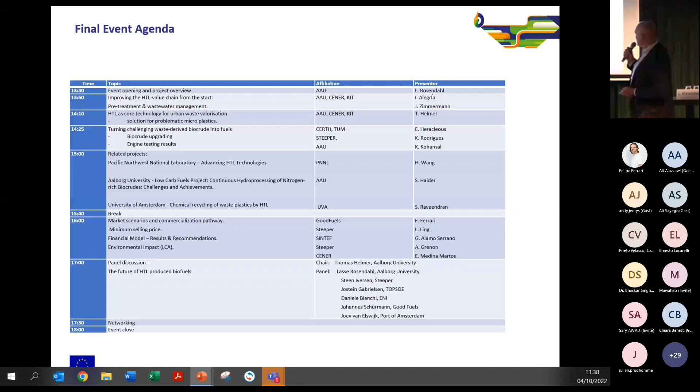Let me start. Let me give you an overview of what this project was about. So it's a project of 11 partners, 7 countries, 5 million euros, and 4 years. And we set out

with an ambition to address the circularity around our cities, and to do something good for the environment.

And because this was a response to a road fuel call, you can also, of course, tell from the name that it was focusing on diesel and gasoline, but we managed to sneak in marine fuels as well.

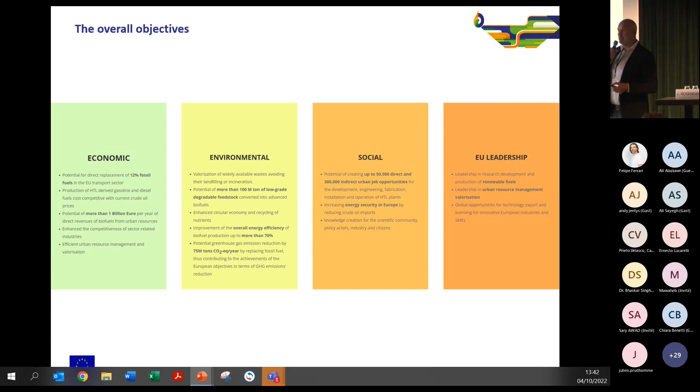Job creation is something we also targeted, direct and indirect, 50,000 and 300,000. And also this European leadership in renewables, the ambition that Europe should really lead the world in renewable energy. So these were the overall objectives that we started out addressing.

So what did we do, how did we do? Well, we have spent a lot of effort looking at pre-treatment, not just to make a feedstock that is better for the downstream process, but also to see if we could valorize side streams. This has been a big part of the project.

We have been operating at fairly large scale, pilot scale HTL. We've processed a lot of sludge, reaching something like 8 tons of sludge. And you can see we had, of course, the Corona break in the middle, but kept going after that.

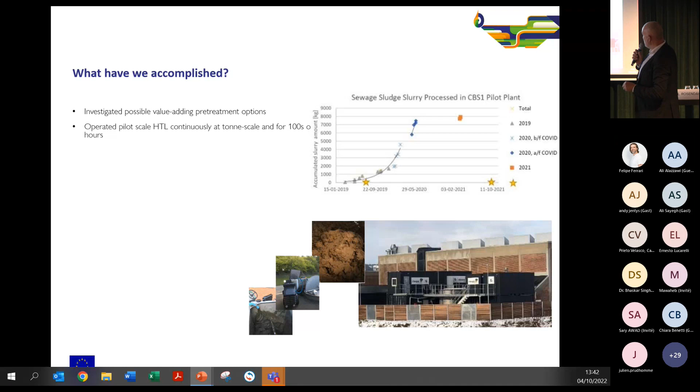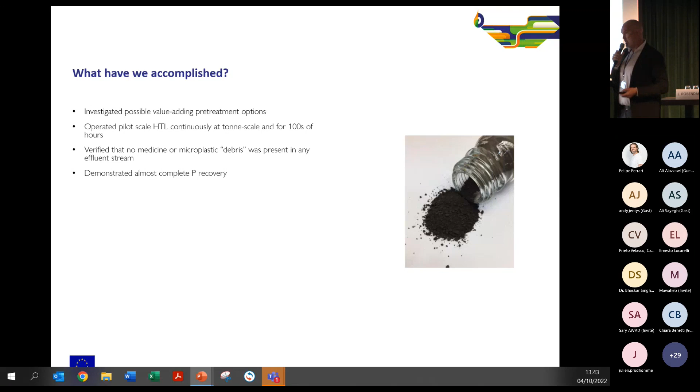We've been running continuously for hundreds of hours. We've been able to establish that none of the harmful stuff makes it to any of the effluents, so microplastics, medicine, debris—everything is really trapped in the HTL process. On the other hand, we've also demonstrated that we can recover some useful compounds, inorganic compounds, for example phosphorus, which is also present in the sludge in large quantities.

Working at pilot scale, we've had to come up with a method to take the raw biocrude and transform it into something that could be hydrotreated. So we've designed and implemented a pilot scale conditioning stage in order to accomplish this.

We've looked at water management. Water management is a key part of running efficient HTL, so we've been looking into many different ways of handling the water. This is an example from some of the membrane filtration that we've looked at as an approach to handle this.

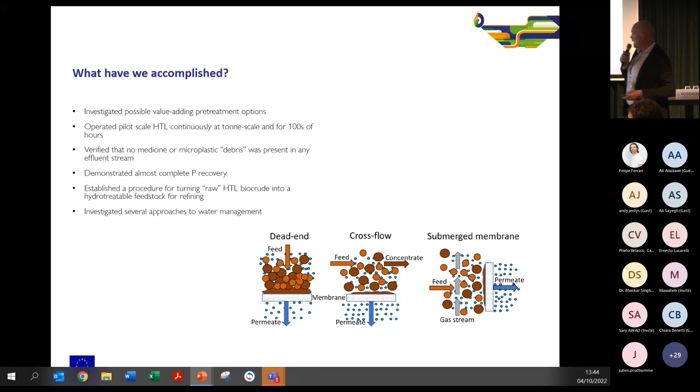The raw biocrude has been hydrotreated, again at pilot scale, and this is a very important feature of the project—we've worked at a scale that I think is first of a kind for HTL projects. We've actually been working at very large scale on all the stages we've looked at, working with multi-stage hydrotreatment.

At various sites, we've been looking at new ways of examining the effect of this hydrotreatment on the product, to determine to what extent we were actually going in the right direction. So also looking at new analysis methods.

We have generated lots and lots of data—very high quality, very high resolution, and of course complicated again by the scale, the fact that we're working at very large scale.

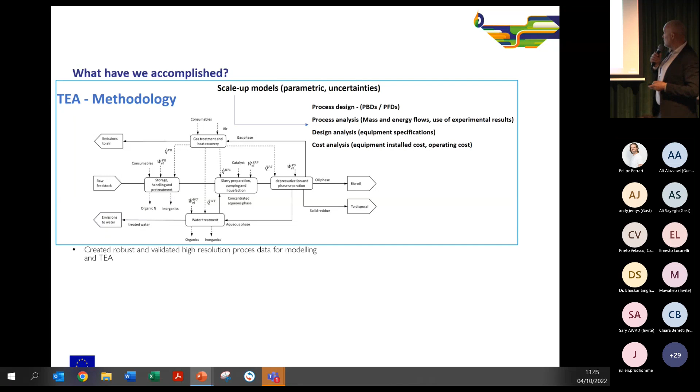I'm speaking as a university person now, not as an industry person, so I know there is a difference. But still, we've been working at a scale where all of the unit operations have to be linked, and in that linking it's really difficult to maintain full closure of mass—it's really hard not to lose anything. But we've accomplished that.

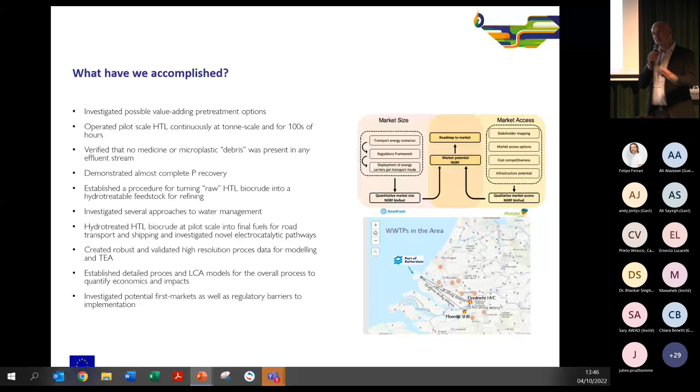We've turned that into process models. We've turned that into life cycle analysis in order to establish impacts, and we've also looked at how do we actually roll this technology out. So one thing is looking at all the technical stuff, but also to try to set up a road to market, identify viable placements and infrastructures in order to implement such a technology into both the waste management infrastructure and also into the energy infrastructure.

So overall, HTL is an attractive technology for such waste streams. It has high energy yield. It has a low environmental impact in terms of the effluents, and it also has a high potential for this circular use of inorganics. So there are lots of pluses here.

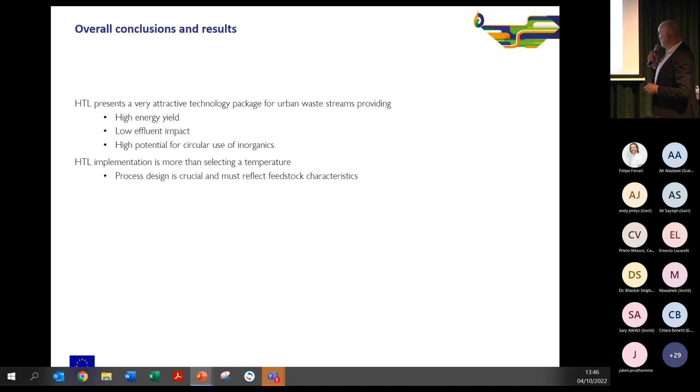One thing also to keep in mind is that HTL is more than just setting up and running something at a temperature—you see a lot of data from batch, but it's much more complicated than that. This whole process design is really crucial and has to be fully aligned with whichever feedstock it is that you are putting into the system. You'll see lots of examples of that in the following.

There are, of course, challenges. Again, one of the things that happens when you go into pilot scale and run continuous mode for very long times, you start realizing things that you might not have realized otherwise. One of the things is we have this challenge on deposits in the heating stage of the HTL system. That, of course, is a barrier if we can't solve this.

But out of all the work that we've done, we've also been looking into this pre-treatment and trying to see if that poses some differences. This could very well be a workaround—you actually do the pre-treatment, even though you lose carbon, but you get an enhanced yield. So you remove potentially your problem with the phosphorus, and you don't actually lose much on the overall performance, even though you make a more complicated process. This is a really interesting thing to look into.

And of course, the other thing that comes out of this is that we have much less nitrogen in the biocrude, and nitrogen in the biocrude, you'll hear much more about that, is somewhat of a challenge.

A regulatory barrier that we've identified is that a technology such as HTL is classified as a disposal technology in the official classification. That means that this whole upcycling, this value creation that lies in sending phosphorus on and also making an energy product, is not valorized. And this, of course, is an issue on the more regulatory side.

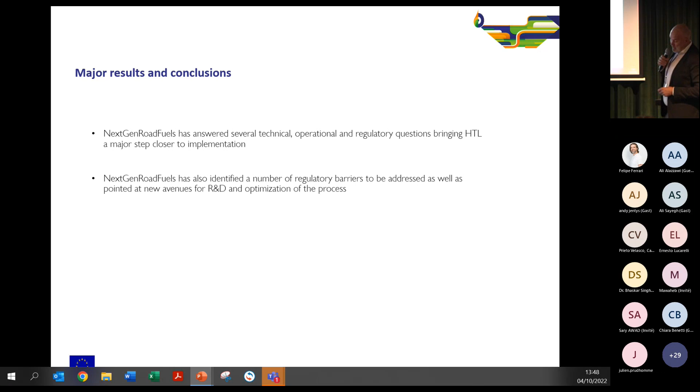So in summary, over the last 4 years we've addressed a lot of both technical and operational, and regulatory questions, taking HTL much closer to something that can be an implementable technology. We've identified regulatory barriers, and also found new topics for R&D, for example deposit formation and the pre-treatment workaround, in order to make the process even more optimized. All in all, I think it's safe and fair to say that we've contributed significantly to the maturing of HTL as a viable technology for urban waste stream utilization. We've advanced the associated science, and also contributed to this ambition of positioning Europe as number 1 in renewables.

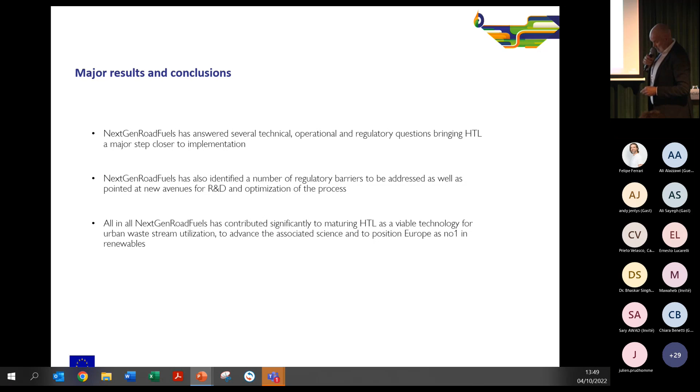And I think... I had a couple more. I had a slide, I thought, that would say thank you to the partnership, but I guess that'll come later on. But let me say it anyway. I think it's been a great effort from all of you. We've had a challenging time in between where we could only meet online and not in real life. Luckily we've had the opportunity for a few meetings. But in spite of all of this, it's been a pleasure, and it's been a great effort by everyone. So thank you very much for that.

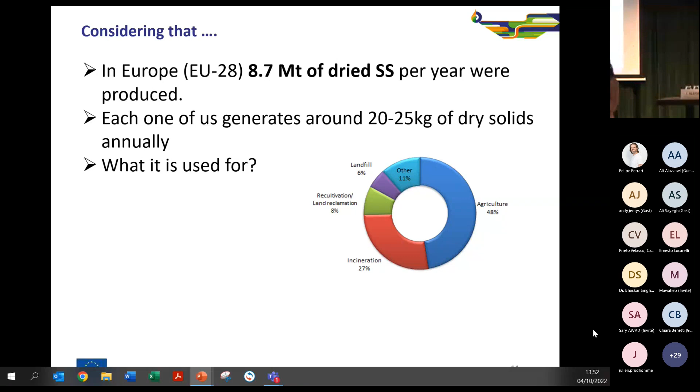So, why not sewage sludge for biocrude production? Quite interesting. But we know that sludge composition varies from one place to another. Another critical point of the composition of sewage sludge is its nitrogen content. We know that nitrogen is a very problematic compound during the process, producing nitrogen oxides, so this has to be removed. Normally nowadays it's removed during upgrading, but it's quite difficult to remove because of its recalcitrancy. So why not try to reduce this nitrogen content before the HTL process.

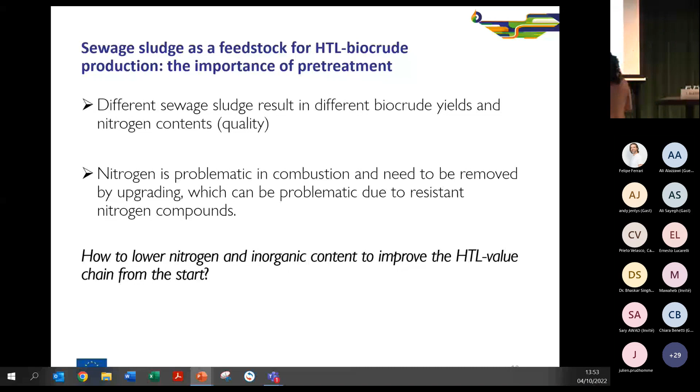First of all, I would like to present where the samples that we have been using during the project come from, because they are quite variable. They come from 3 different countries: Denmark, from Aalborg concretely, Germany, and Spain. They also have variability in terms of production. For example, the sample from Aalborg is in the form of pellets, with a very low moisture content, whereas the sample from Germany, concretely from Karlsruhe, comes from a primary sludge that is centrifuged, and normally this sludge is used for incineration. In the third case, the sample from Spain comes from a wastewater treatment plant located in a small town, but nearby there is also agro-food industry. We will see how it affects the composition.

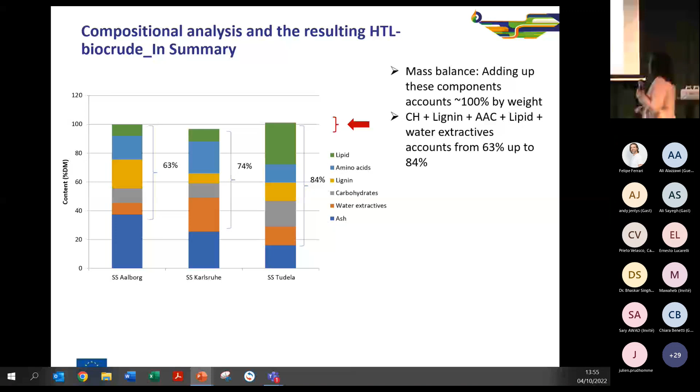This has an impact on the HTL process. When these three samples are subjected to an HTL process, it has an impact not only on the biocrude yield, as can be seen here, but also on the composition. For example, the yield in terms of biocrude production for the Aalborg sample is significantly lower compared to the Tudela sample.

We also took a deep look at the distribution of nitrogen in these samples. Something interesting is that most of the nitrogen is in the form of organic nitrogen, in the form of amino acids that constitute proteins. That accounts for around 55 to 73%.

A minor amount of this nitrogen is in the form of inorganic nitrogen, mostly in the form of ammonia, accounting for another 8 to 14%. But there is still another part of the nitrogen, accounting for 16 to 30%, that is in the form of prosthetic groups, such as phospholipids or peptidoglycans.

What we have seen and corroborated is that there are variations between these different samples in terms of nitrogen composition and nitrogen distribution. If we look at the inorganics content, we have seen that the ash content of each sample varies quite a lot.

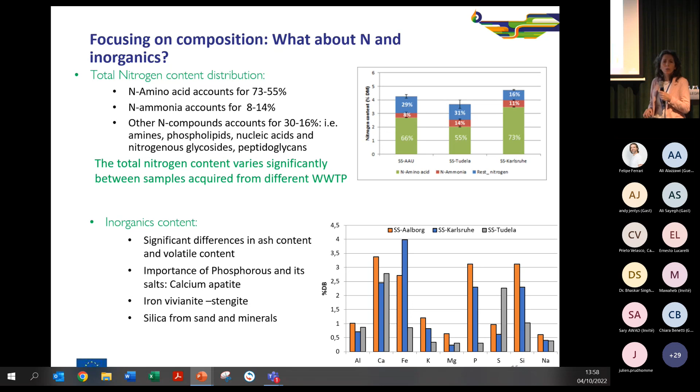So how do we address the reduction of nitrogen? As I spoke earlier, what we wanted was to remove the nitrogen from the very beginning. For that, we applied three different strategies. The first one is what we call the chemical pathway, where we mix the sewage sludge with an acid catalyst, subjected to a temperature around 150 degrees, pressure around 20 bars, for half an hour.

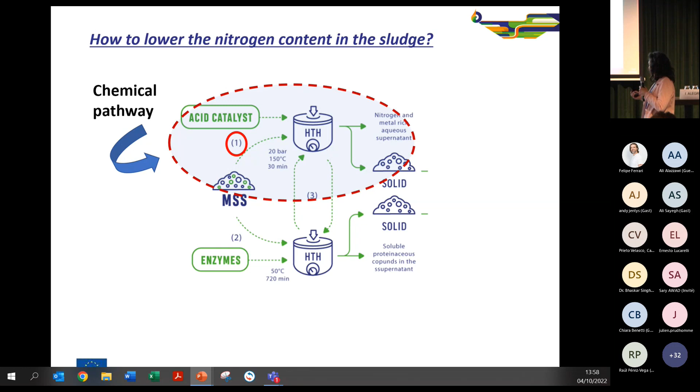The outcome was a solid with a lower content of nitrogen, because the nitrogen was in the soluble fraction. A similar outcome came from the second strategy, which we call the enzymatic pathway, but in this case, instead of using an acid catalyst, we use enzymes.

Enzymes are quite specific, and normally perform much better under mild conditions, in terms of temperature, pressure, and so on. The main issue compared to the previous strategy is that it requires longer residence time. The third strategy was the combination or integration of these two previous pathways.

Let's see the main outcomes of these strategies. For the chemical treatment, we reached a solubilization of more than 70% of the nitrogen. But not only that, we also realized that the pretreated solid composition varied in terms of carbohydrate and lipid content.

This is because most of these structures are being concentrated. But not only that, the use of this catalyst also triggered the solubilization of some inorganics, such as calcium or iron, reducing the ash content in the pretreated solid.

As for the enzymatic pretreatment, once more the threshold of 70% of nitrogen removed was reached. Enzymes are quite specific, as I said previously, and they can solubilize most of the proteins. They require mild conditions, but longer residence time.

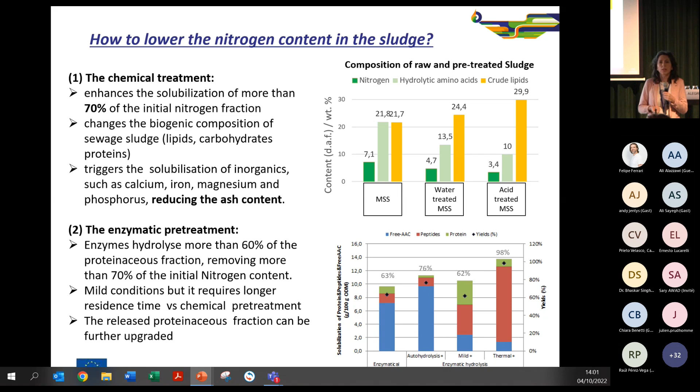What is interesting is that the nitrogen released in the soluble fraction is still in the form of protein or peptides - meaning a protein that has been broken down into small peptides, or even free amino acids. This fraction can be upgraded and valorized, as we will see later.

For the third strategy, we combined the two pathways one way or another, first chemical followed by enzymatic, and the other way around. What we saw was that combining enzymatic first, followed by chemical pretreatment, gave us the best results in terms of nitrogen removal, as well as reducing the inorganic content in the pretreated solid.

So we know that when removing these nitrogen compounds, we are also removing carbon, and this carbon loss can be as high as 40%. It depends on the severity of the treatment, but on the other hand, we know that this fraction can be valorized and upgraded.

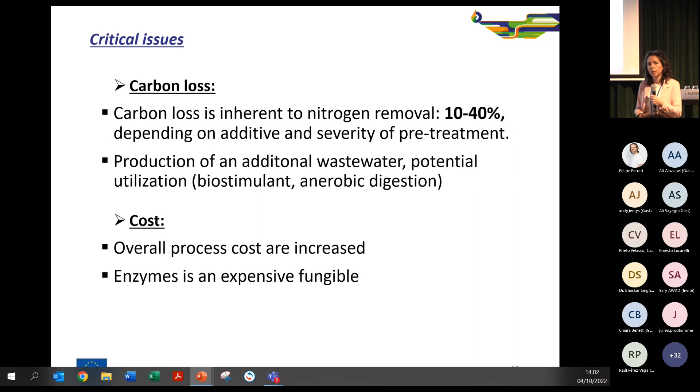Looking at the chart of the HTL process, if we include another step, this means an increase in equipment cost, an increase in overall cost, and an increase in energy demand. So that's something that has to be considered.

But on the positive side, when this pretreated solid is subjected to an HTL process, we would obtain improvements not only in yields, which can be accounted to more than 22%, but also in terms of quality. Why? Because on one hand, there are fewer nitrogen-derived compounds, such as nitrogen heterocyclics or aromatics, but on the other hand, the amount of aliphatic compounds, such as fatty acids, is increased. So the quality of the biocrude is improved.

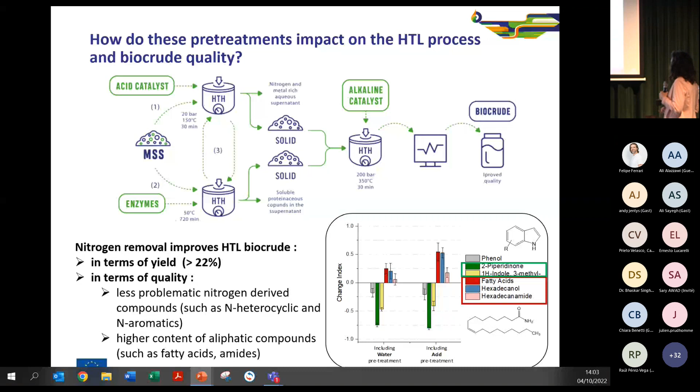And as I mentioned earlier, if we have a fraction with soluble peptides, amino acids, and proteins, it can be used as a substitute for fossil-derived fertilizers. But not only that, it can also be used as what is called a biostimulant.

Nowadays, the definition given by the EU for biostimulant is compounds, or even microorganisms, that stimulate the natural processes performed by the plant in order to improve natural nutrient uptake, nutrient efficiency, or crop quality itself.

So which are the main outcomes? On one hand, there were no big differences compared to the commercial biostimulant in terms of biomass production. But something quite interesting is that when using our product on the plants subjected to salinity stress, it was detected that the nutritional composition was better compared to the other plants.

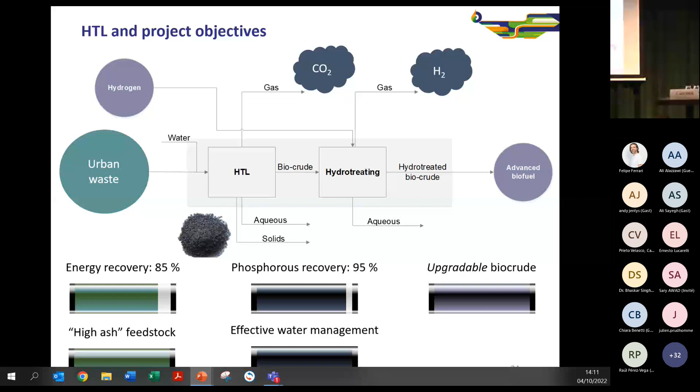Overarching, we worked at different scales with HTL — lab scale, but also continuous scale, rather lab scale, as Lasse mentioned. We had quite a learning curve here, shown before COVID. And of course, we learned that there are large challenges with these urban feedstocks.

Scaling and fouling is one thing, but also when you start mixing things — like at home, when you mix mashed tomatoes and beef and water, and suddenly you have a bolognese. This is the same thing in HTL: when you start to mix everything, you might get an emulsion. This is really what happens.

When you process these urban waste streams that have a lot of different stuff — different heteroatoms, inorganics — you start mixing things up. So you don't get a clear water phase, a clear oil phase, and a clear solid phase as you'd like. Quickly in this project we realized this was a risk, so we had to design and install completely new separation techniques that weren't really accounted for in the beginning.

The aim was to produce high quality biocrude, since this wasn't the end of the project — there was a whole work package working on downstream upgrading waiting for high quality biocrude. We had to produce something that really worked. In the end, we managed, which I think is a major achievement, to produce more than 100 kilos of biocrude in what we call upgradable quality that goes straight into a hydrotreater.

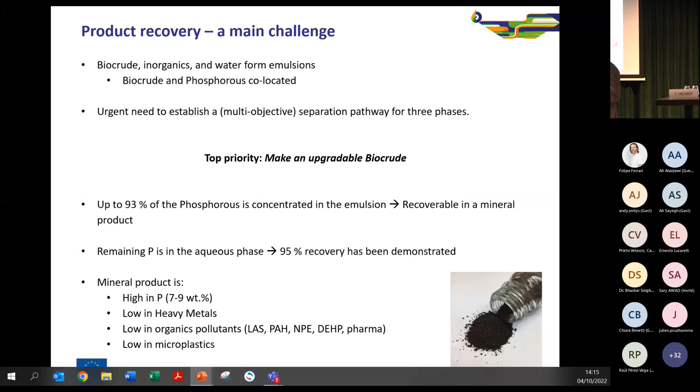contaminants. We had it verified on polyaromatic hydrocarbons, pharmaceuticals, and so forth, and also on the microplastics that Lasse mentioned. So basically, we managed to produce an upgradable biocrude while at the same time producing a byproduct which has a really circular impact, which was very nice.

Now a little bit on the microplastics, because that was an ambition early on in the project. But the problem is that there was no method for quantifying microplastics. So with some colleagues from our wastewater engineering department, we developed a method. You can imagine you have to remove everything that's not microplastic, so how do you make separation techniques and so forth? Then when you have the microplastics without everything else, you need to quantify it. In this case, there's a coupled technique between microscopy and micro FTIR.

With this technique, you can count all the particles, you can count the size distribution, and with the IR data you can also see what kind of plastics it is. And so we found quite a lot of plastics. I think in total there were 14 types of plastics quantified, size distributed, and everything.

Then we looked at where the microplastic ends up and how much was destroyed. In gross figures, we realized that almost everything is destroyed, which was very intriguing. We know that some of the microplastics that are left are mostly polyolefins, which is by no means surprising because they are the most thermally recalcitrant. But again, a very strong number out of this project.

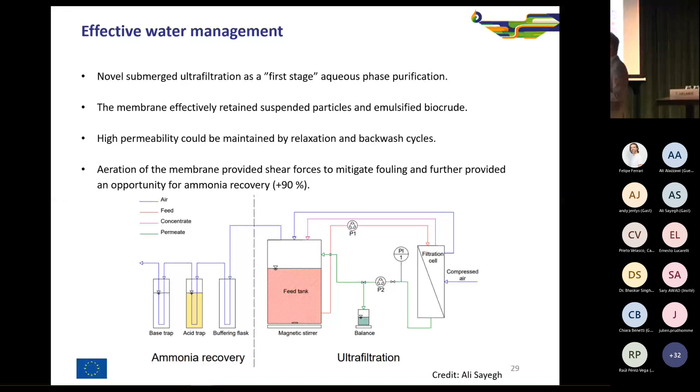Now, when we removed all the dirt in the aqueous phase, we still have to remove all the excess water so we can bring back the organics. And here the second stage was then the membrane distillation.

I think KIT came really far, found that you could maintain high fluxes at a 60% recovery. I say you remove 60% of the water, even 70%. I think at 80% you start to see some wetting and some crossover of the organics on the membrane. And of course, you also see some fouling here, but you can also deploy different operational procedures that maintain the high fluxes. I can't remember the number entirely, but I think it was operated at about 1,000 hours. So quite impressive.

And I think that brings me to the conclusions. So through the process, we really gained a lot of experience, goods and bads, about HTL working on these high inorganic waste streams. We know that we can process it. We know that we can have high performance, but we still have challenges ahead that we need to solve.

And then I think more importantly, we actually demonstrated that the biocrude can be upgraded, which is really the showstopper if you cannot. Then again, as I said, we have high recovery of energy and carbon. We potentially have high recovery of nitrogen as well. And we know that we can have high recovery of phosphorus.

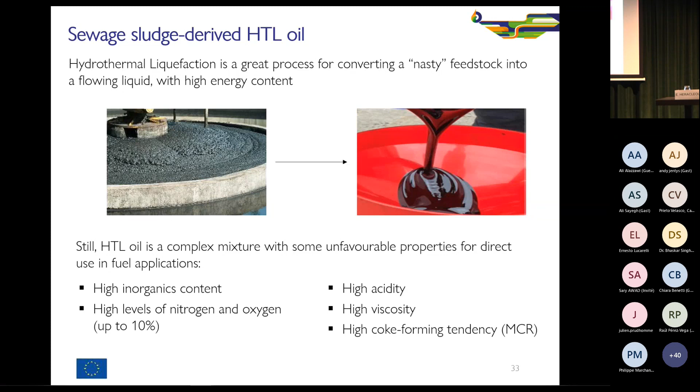These are some properties of the HTL oil we got from Aalborg and Steeper, produced from sewage sludge. As I said, very high heating value, and this is a big plus. But on the other hand, we have a high microcarbon residue and TAN number, representative of acidity, about 100. As I said, inorganics - we found out together with Steeper, Haldor-Topsoe, ENI and other partners that this is iron for the most part, about 700 ppm. And when it comes to heteroatoms: 10% oxygen, 2.5% nitrogen, and about 1% sulfur.

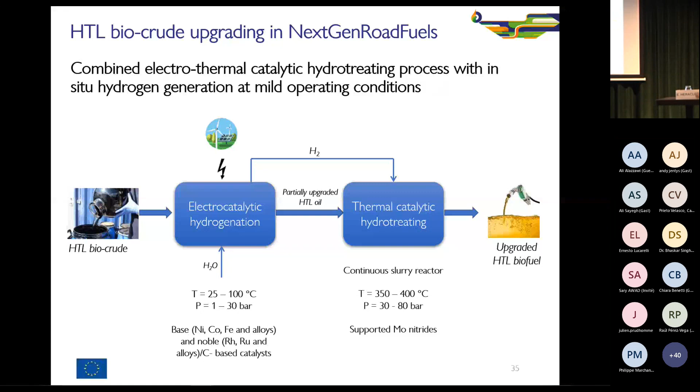The electrocatalytic hydrogenation was investigated at TUM, where they built a high-pressure titanium cell with a Nafion membrane that allows conversion of organic compounds without fouling, in a continuous mode. You feed the organic substrate on the cathode side, and water on the anode side. The water is split into protons that go through the membrane and hydrogenate your compound, while at the same time producing additional hydrogen. It was demonstrated at TUM that we can directly add hydrogen to organic substrates and produce hydrogen at moderate current densities and elevated pressures.

Of course, we need to work in water, and the oil is organic, so by default you create a biphasic mixture. They also did tests to show that it works in a biphasic configuration, where you have your aqueous phase and your organic phase, and you can still hydrogenate the HTL biocrude.

Electrolysis does offer a scalable, decentralized route to hydrogen addition. So conceptually, it could be something done in a decentralized location, and then we have this more stable oil being transferred to a classical refinery for further upgrading.

I don't want to go into too many details, but they've done tests with several concentrations of electrolytes, so different ionic strength in the cell. They saw that you can increase the rate of hydrogenation without affecting the generation of hydrogen. And again, working in a biphasic solution, we are able to hydrogenate the compounds that we want.

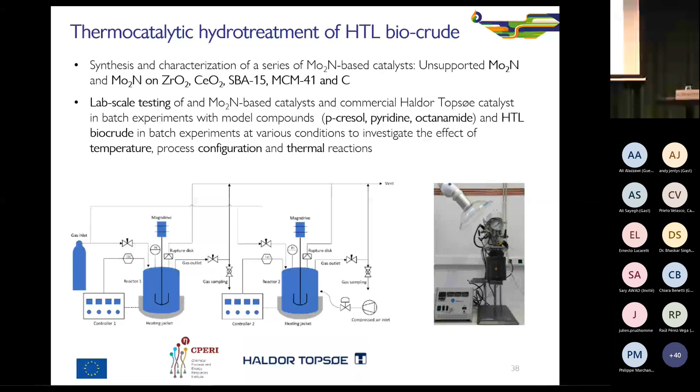We recently published part of this work together with ENI and Steeper in Energy and Fuels. So I will skip this part and go on to the continuous tests we ran in the pilot plant unit that we have in CPERI. It's a continuous unit, and what's nice about it is that it's equipped with two types of reactor: a fixed bed reactor and a slurry reactor connected to the unit. So we can run it continuously and easily check the effect of reactor type on the entire process.

So we first wanted to see this effect of reactor. We ran one-stage hydrotreatment continuous tests with the HTL biocrude at 3 different conditions, 250, 290, and 350 degrees Celsius, with exactly the same reaction conditions and catalyst in both reactor types, pressure 100 bars, and a hydrogen to oil ratio of about 1,000 on a volume basis.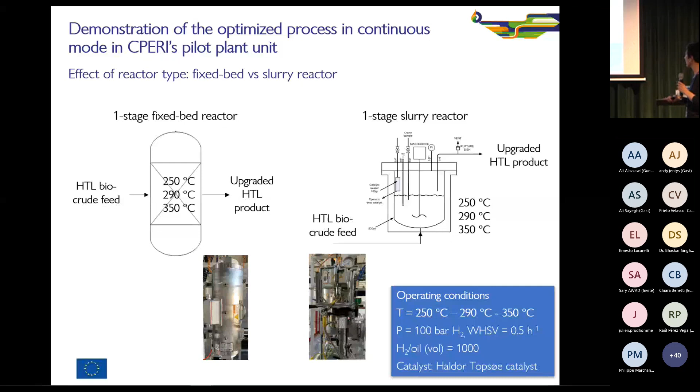So what I'm showing here as an overview is the yield to the different products at the 3 different temperatures we studied in the fixed bed and the slurry reactor. The black dots show the consumption of hydrogen in each reactor type and temperature. What was nice is that in both types of reactor, we got high oil yields, starting about 95-98% at 250, and even at 350 we had about 90% yield in oil, so we did not lose it in gas, and there was no extensive coke formation. We also saw we don't have too many differences attributed to the reactor type.

We were interested to see the removal of heteroatoms. So I'm showing here how much of the nitrogen, oxygen, and sulfur was removed at 250, 290, and 350, again for the two types of reactor. Obviously, as temperature increases, removal increases, but we can see how resilient nitrogen compounds are. We have no removal in either reactor at 250 and 290. But if we go up to 350, we almost completely remove, or to a very high extent, the oxygen and sulfur. And we managed to get with the slurry reactor a 54% removal of nitrogen, which is pretty good for a one-stage process.

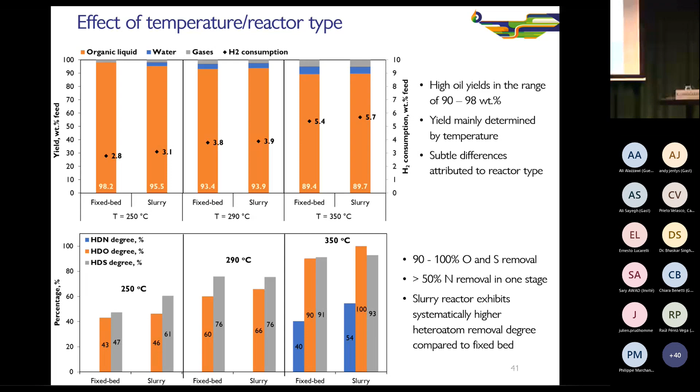Comparing between the two types of reactor, we can see systematically a slight but always higher heteroatom removal degree compared to the fixed bed reactor operation. Once we saw this difference between reactors in one stage, we wanted to run a 2-stage hydrotreatment test in our pilot plant. We started with a biocrude feed, put it in the fixed bed at 290 to do a partial stabilization, and then fed the stabilized oil to the slurry reactor at 350, keeping all the other reaction conditions constant in both reactors.

I'm comparing here the removal of heteroatoms achieved in the one-stage operation in the fixed bed, one-stage operation in the slurry reactor, and the two-stage process configuration. It's clear that here we achieve the highest removal of heteroatoms. As I said, oxygen and sulfur are not a problem, they can be easily removed, but here we achieved more than 80% removal in nitrogen, something which is very important for the further use of the biocrude, the biofuel, in fuel applications.

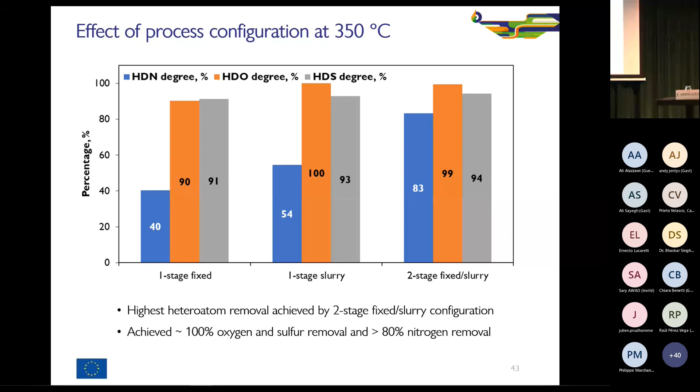I'm showing here the properties of the best oil that we got from this two-stage hydrotreatment process. Here are the properties of the feedstock, and here are the properties of the upgraded product. We can easily see that we have a huge improvement.

We increased the heating value to levels similar to fossil-based fuels. We managed to completely remove sulfur and oxygen, and 83% of nitrogen. Also important is that we managed to demineralize the oil—the iron content is almost completely removed. We also lost all the acidity of the oil and the microcarbon residue.

We ran an extensive set of analyses to understand how the oil looks. I'm showing here some results from the GCMS analysis done at CPERI. Here is the feedstock, where you can see a very high concentration of acidic compounds. We also have nitrogen-containing compounds, ketones, some aliphatics, and some aromatics.

It looks completely different in the upgraded HTL oil—we have a complete removal of the acidic compounds, which we cannot detect with the GCMS. We have very high production of aliphatic and aromatic compounds. If we look at specific molecules, there are many in the C10 to C18 alkanes range, BTX, alkyl benzenes, and some alkyl naphthalenes.

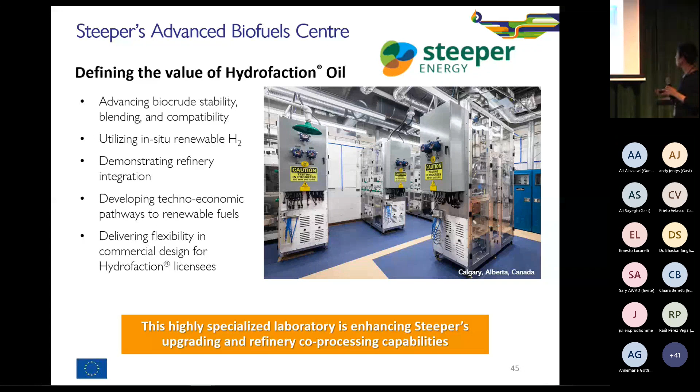Katerina, you know better than me about advancing the stability of the biocrude, checking blending compatibility, demonstrating refinery integration, and investigating how the HTL oil can be upgraded and integrated into refineries for co-processing. The team at Steeper ran the hydrotreatment process in their pilot scale units for more than 400 hours time on stream.

They achieved very stable operation using a commercial catalyst with a two-step hydrotreating process: one step at 290 degrees to stabilize the oil, and a final step at 350 degrees Celsius—conditions similar to what we used at CPERI.

Here you can see the properties, the yields of the oils—the feedstock, the oil from the first step hydrotreatment at 290, and the final upgraded product. I was very happy, Katerina, to see that we got similar results.

You also managed to remove sulfur, a high percentage of oxygen, and about 70-75% of nitrogen. Iron was completely removed, viscosity went down, and TAN was below detection level—so a very good fuel.

At the end, here are the simulated distillation curves—this one for the feedstock and intermediate product, and this is the curve for the final product, where again you can see about 80% gasoline and diesel fractions, with the rest going into marine drop-in fuel.

So we managed to show in these three years, Thomas, that it is an upgradable HTL oil, and we showed this in many ways. It's a proof of concept that sewage sludge derived HTL oil can be upgraded by hydrotreating, solving also the issue of inorganics and iron, which were removed during the upgrading process.

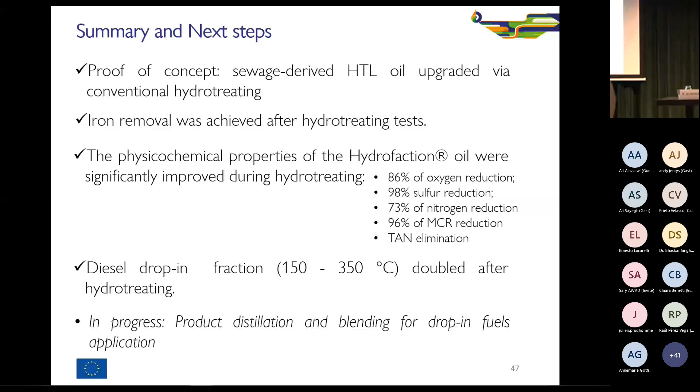Well, the missing thing here is really the availability of the phosphorus and the nutrients and so on in the mineral product that we have. Based on ecotoxicity, of course we get all the heavy metals in the mineral product, but on concentration, based on the phosphorus and so on, we know it's no worse than the sewer sludge that went in. But we know that we also destroy all the other critical contaminants in there. As I mentioned in my presentation, we have no medical residues, no aromatic hydrocarbons and so on. So I think overall the ecotoxicity and the toxicity in general is really low for this byproduct.

Thank you, Dean has a comment. And you can add destruction of pathogens and those compounds - that has also been proven. Great, thank you for that.

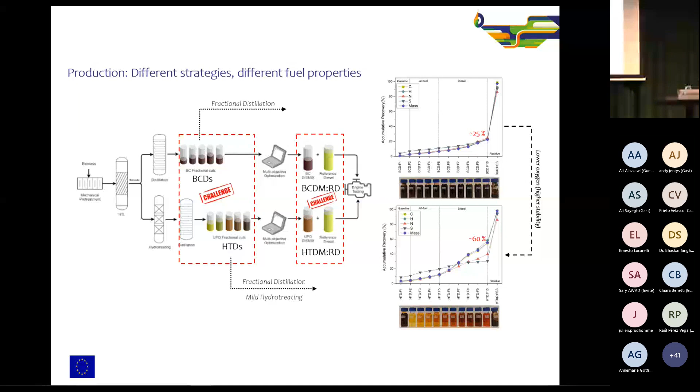But we wanted to do it the other way around, so we could follow the EN 590 standard specification for diesel to produce a diesel bioblend stock. The next slide will be about the multi-objective optimization that we used.

We firstly distinguished different properties that were limiting on the property side. Then we used the model to calculate the blending of the distillate fractions, and mathematically calculate the introduction of that blend to the reference diesel. Using this blend, we obtain the optimal fraction mixing, which we call DM, distillate mixture, and then the optimal mixing of DM with the reference diesel.

Here you can see the results of the first scenario. The problem with the biocrude and its distillate was that we saw the first blend wall, which was the sulfur content, at 0.5. So it means we were not able to add any of those distillates to the reference diesel if we wanted to be on spec.

The second blend wall was at 5%, which was water content, and you can see the composition of that distillate mixture. So the action we took was that we didn't produce any on-spec fuel using the biocrude distillates, but we did a 10% biocrude distillate mixture for the engine testing results.

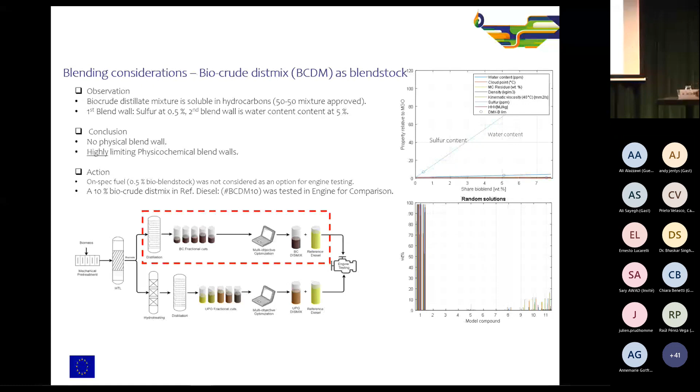The second scenario was the hydrotreated or pre-stabilized oil. As you can see, the sulfur content moved from 0.5 in the previous scenario to around 10%, because of the removal of sulfur during hydrotreating. The first blend wall here was at 5 weight percent.

It means we could at least add 5% of the distillate mixture to the reference diesel to have an on-spec fuel. So here we made one fuel with 5% of the bioblend stock and another with 10% of the bioblend stock, giving us two different samples for the engine results.

But before the engine testing, we did an aging and stability test. We used the biocrude and the distillate mixture of the biocrude, and also the hydrotreated and the distillate mixture of the hydrotreated. In the first four weeks, we could see a big difference and change in the HHV, probably because of condensation and polymerization reactions that could happen.

One might argue it's a good thing to have a higher calorific value, but at the same time, the viscosity of the fuels changed significantly, which makes the handling, transportation, and burning of the fuel in the engine way more difficult.

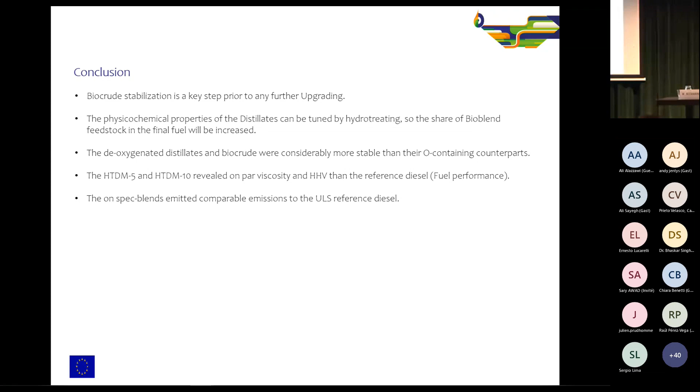What was the viscosity you were targeting for atomization? The viscosity of the upgraded fuel, and the reference, was 2.5, which is the viscosity in EN 590. But the BCDM, the biocrude without any pre-stabilization, had 4.5. So we were trying to push down the viscosity to 2.5.

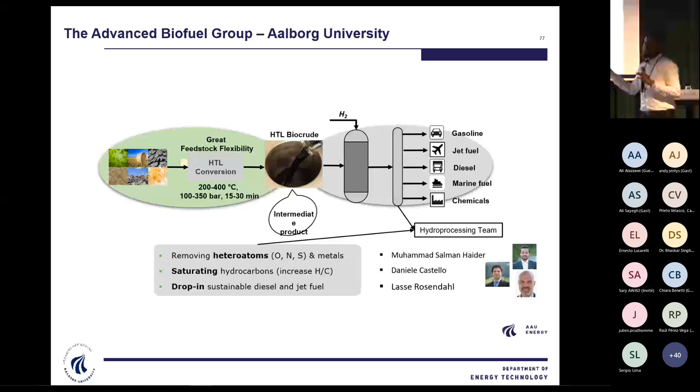We work on all these kinds of feedstocks, which are converted into HTL biocrudes, and we work on the continuous hydroprocessing of these biocrudes.

This is a continuous unit at Aalborg University. The usual throughput we go up to is 80 ml per hour, and it can go up to 150 bar of pressure. We can use it in series or in parallel. That's the general scheme of the catalyst in the reactor bed.

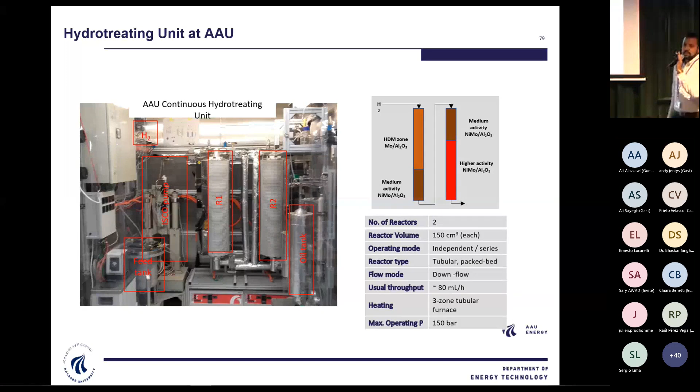In the time lapse, I will try to tell you about 4 different projects. The first project, when we started the hydroprocessing activities at Aalborg University, was for refinery. And at the end, I will talk about this low carbon fuel project, on which we are doing the hydroprocessing activities as I speak now.

Before starting, I will let you know the main challenges during hydroprocessing. There are two main challenges with these biocrudes. One is the immediate plugging of the reactors — that's one of the biggest challenges. How can we suppress the coke formation that happens not due to the metals, because we have metals in the oil that will cause fouling anyway, but how do we suppress the coke formation that leads to reactor plugging much faster? The last thing I'm going to talk about is nitrogen — why nitrogen is a challenge, and where we are now at Aalborg University.

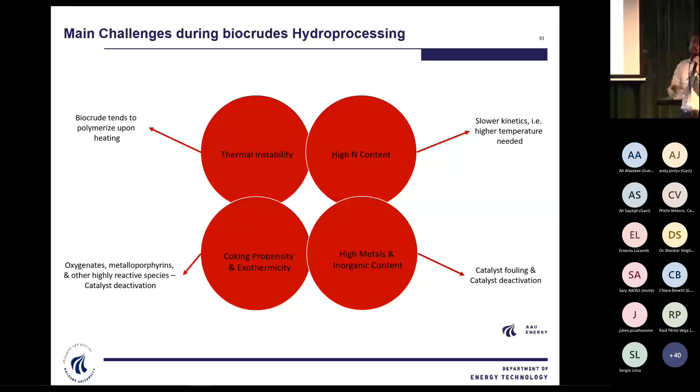In early 2019, we started this project for refinery, doing hydroprocessing activities. In 6 months, we had 3 failures — the maximum continuous run achieved was 10 hours in 6 months. We tried every route written in the literature, every possible scheme with a commercial catalyst, but it ended up plugging within 4 hours, 2 hours, or after 10 hours.

So then we started rethinking the whole process to understand what these HTL biocrudes are, because we have a lot of different feedstocks. Instead of looking at this through a reductionism mechanism — reductionism being when you look at a thing at a very small scale but don't get a link to the overall picture — we needed a holistic approach to get to the suitable hydrotreating temperature, so that when biocrude sees the hydrotreating reactor, we don't cause plugging. That was the whole work.

Biocrude, as Ali already spoke, is highly complex. We have highly reactive compounds like carbonyls, to least reactive ones like polyaromatic hydrocarbons. So it's very diverse in nature, and they are not thermally stable — that's one thing to note. So what do we keep in mind? Because, as I said, we need a holistic approach.

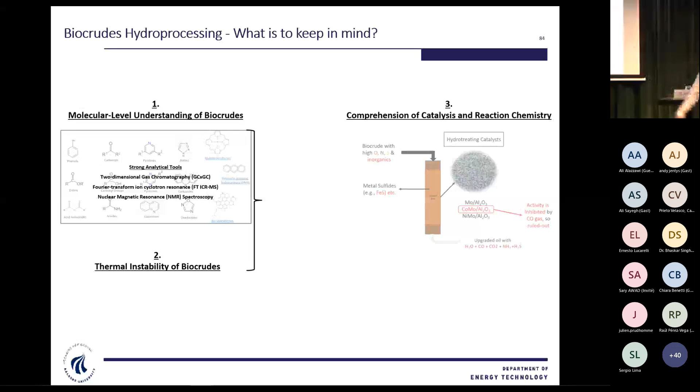After having all that knowledge and putting it into context, between end of 2019 to 2021, which was a core part of my PhD too, we worked on spirulina algae biocrude, sludge biocrude, and wheat straw, achieving continuous hydrotreating operations for 335 hours for spirulina, 165 hours for sludge, and 215 hours for wheat straw. In all cases, biocrude was finished. No sign of coking, plugging, anything was observed.

And nitrogen removal, why is it necessary? Because for now, nitrogen at 2 ppm is a safe limit for already approved fuels. So it means, and I have talked to a lot of people from ASTM standards, it seems like we have to go toward that robust limit. We have to follow that 2 ppm thing. Still now, there is no approved standard for HTL biocrudes, but we're going to go toward that because they are so conservative on these things.

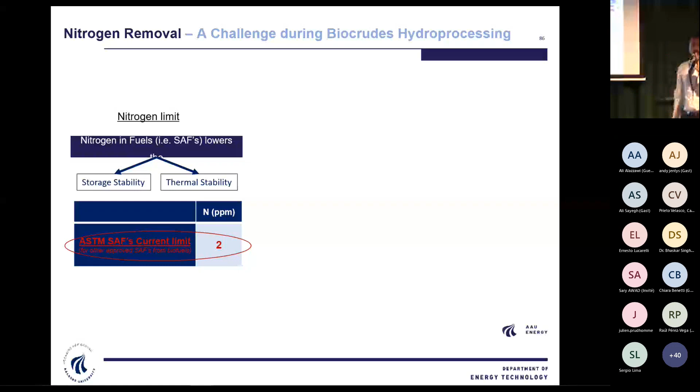So what's the problem? The problem is when we talk about nitrogen removal, it's not like in fossil crudes. Nitrogen is homogeneously distributed. Even if you go at 400 degrees C and do the hydroprocessing, 90% or 98% nitrogen is removed, but nitrogen is homogeneously distributed in all cuts. For example, in case of spirulina, but we have seen it with every biocrude during the hydroprocessing, it was homogeneously distributed between diesel, jet fuel, and what we call the residue.

So it means we have to reduce nitrogen in the overall system so we can use it as jet fuel. So at the end of my PhD, I was able to achieve complete denitrogenation. And okay, we have achieved it, we know how to do it, and so we don't see it as a problem anymore.

But the one thing we're doing right now, next year, in the low carbon fuel project, which is our next project, we're going to produce liters of fuel so we can distill them, because here only one sample was produced but we were not able to distill it. So we cannot see the whole distillation cuts, jet fuel or diesel. That's the next plan, but we achieved complete denitrogenation. The starting point was 4% nitrogen, something like that.

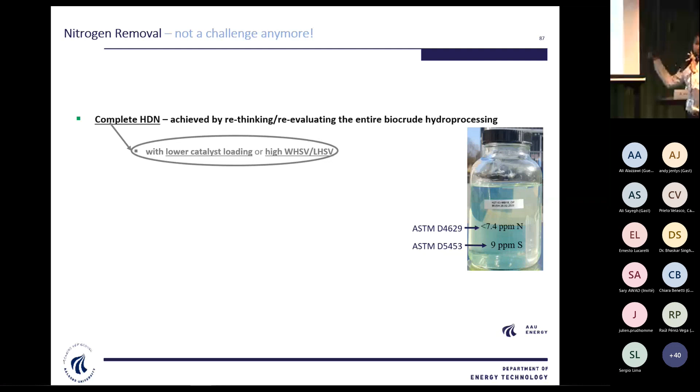In the NextGenRoadFuels project, which you heard about in the past hour, all that learning has been used, and biopulp biocrude was run for 600 hours. Here the project aim was to produce fuel for marine fuel applications or others, but the target was to achieve complete hydrodeoxygenation. So the unit was run for 600 hours, and of course we also studied deactivation due to nitrogen and other things, but I will get into that later.

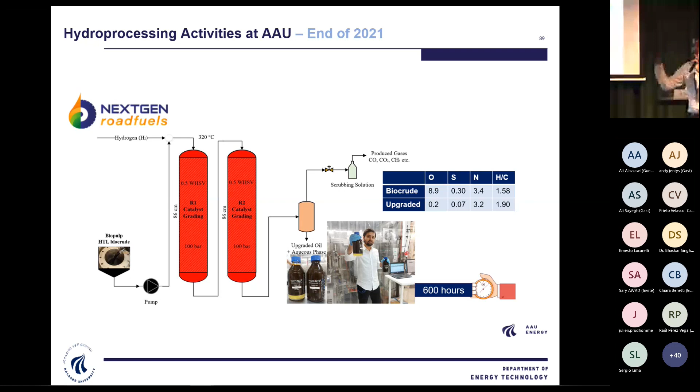So this is a project that we are running at Aalborg University right now. It targets jet fuel, diesel, and marine fuel. And these are the partners which we're working together with, and these are different work packages from standalone upgrading to co-processing.

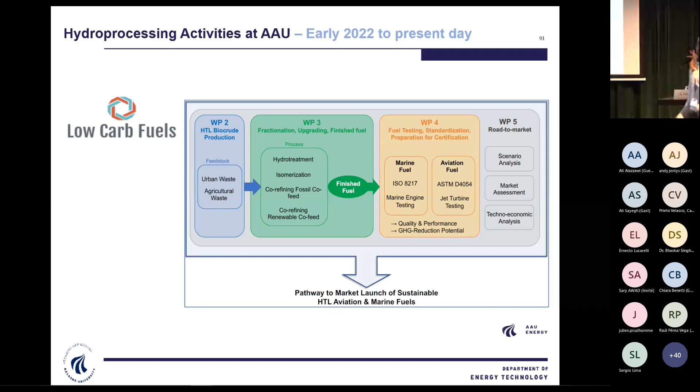In this project, we have been able to run it for 1928 hours, around 80 days, continuous upgrading of HTL biocrude from food waste. The main aim was to study catalyst deactivation due to nitrogen and the effect of metals and those sorts of things. And yes, we did go to 400 degrees C. Next year the plan is to achieve complete denitrogenation on a relevant scale and study the fractional cuts, so we can say for sure what tier or level we're going to be in future for this downstream processing.

So in conclusion, I would like to say two things: comprehensive knowledge about the molecular structure of HTL biocrudes and catalyst is vital if we want to do continuous hydroprocessing of HTL biocrudes. Catalyst deactivation due to coking can be suppressed by identifying the thermal instability, at what point HTL biocrude becomes thermally unstable, and by identifying the highly reactive organic species present in that biocrude.

HTL plus optimized longer continuous hydroprocessing are possible and can produce drop-in fuel such as SAF, diesel, or marine. Complete denitrogenation is still an ongoing topic, but we have achieved it in one sample. Over the years, I have been working on different types of biocrudes, and we are more than confident to achieve it on a relevant scale.

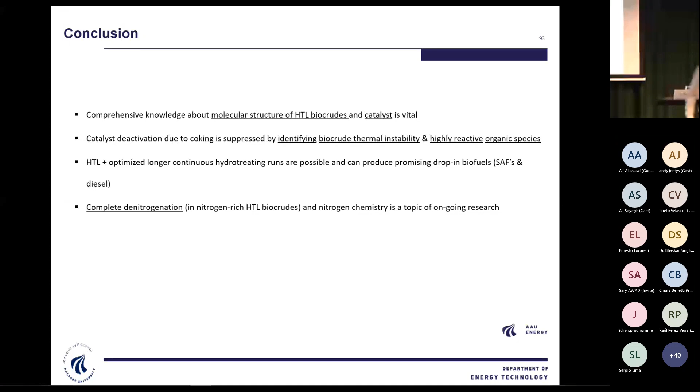Can I hear you? Yes, can you hear me? Hey, hello, okay, nice to see you. Hello, hi there. Let's just get to your presentation. And I think maybe would you prefer to share your screen, or I can click through the presentation on behalf of you? Yeah, let me see if I can. Maybe it's easier for me to just - give me a second. Otherwise I'll just go through.

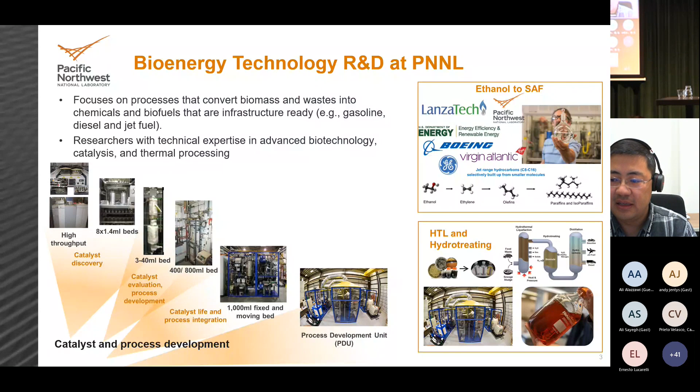At PNNL, we continuously advance HTL technologies. My colleague Mike Thorson presented last year at this workshop and shared our progress toward the HTL process. I would like to give you some updates on what happened in the last year regarding overall HTL. As you know, PNNL publishes the state of technology for the HTL process, including our major improvements on the HTL process.

We are continuously making significant cost reduction in our modeled state of technology and cost for HTL plus upgrading. The most important part is reducing the modeled heat exchanger cost and increasing its robustness, which contributed the most of the cost reduction we achieved in the last year.

At the same time, we have developed a sulfur-resistant and robust catalyst for catalytic hydrothermal gasification and the HTL aqueous fraction. We know another byproduct from HTL is the aqueous fraction, which contains a lot of useful carbon. The major challenge of that process is it has a lot of sulfur that will kill most metallic catalysts. We were able to develop a sulfur-resistant catalyst to really convert and utilize the carbon in the aqueous fraction from HTL.

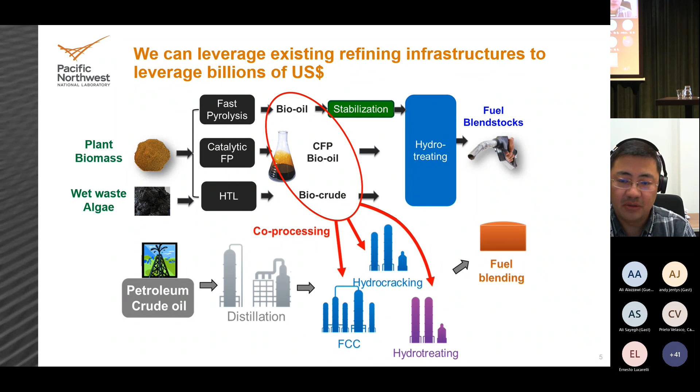At PNNL, we have a project working on co-processing, for both fast pyrolysis -- catalytic fast pyrolysis bio-oils -- and hydrothermal liquefaction biocrudes. For this project, we identified some major risks or knowledge gaps for co-processing, and our project is focused on narrowing these knowledge gaps.

For instance, we look at feedstock quality consistency and biogenic carbon incorporation, and the impact to refinery chemistry, catalysts, reactors, and fuel quality. Also, how can you accurately track the biogenic carbon in a product and in a process, and what are the economic and environmental benefits to both refineries and biorefineries for co-processing. We're trying to narrow all these knowledge gaps through extensive R&D.

This is one of the projects we are working on together with NREL and Los Alamos National Lab here in the United States, working on both catalytic fast pyrolysis and HTL routes. NREL is more focused on co-processing in the FCC unit, PNNL is working more on co-processing in the hydrotreating/hydrocracking unit, and Los Alamos is more focused on developing the biogenic carbon tracking method.

We are supported by a strong industry advisory board, including refineries, universities, and other catalyst providers.

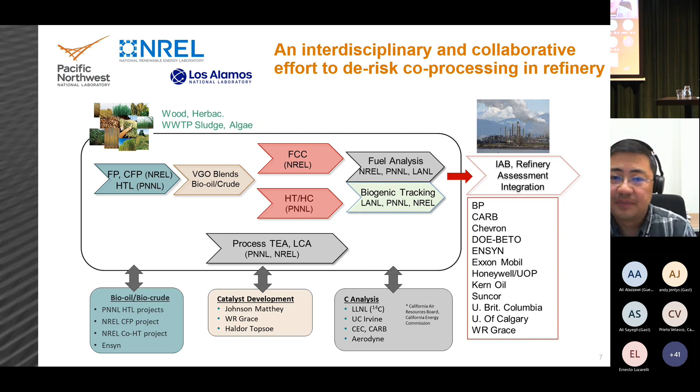At PNNL, we are really focusing on co-processing in hydrotreating. I'll skip this slide quickly -- we are testing different feedstocks, biomass feedstocks, doing detailed feed characterization and measuring hydrotreating performance with more than 300 hours time on stream to get a steady state operation. We focus on hydrotreating and hydrocracking performance, especially nitrogen removal and hydrocracking to maximize diesel yield, and we do detailed catalyst characterization to understand catalyst deactivation and other related aspects.

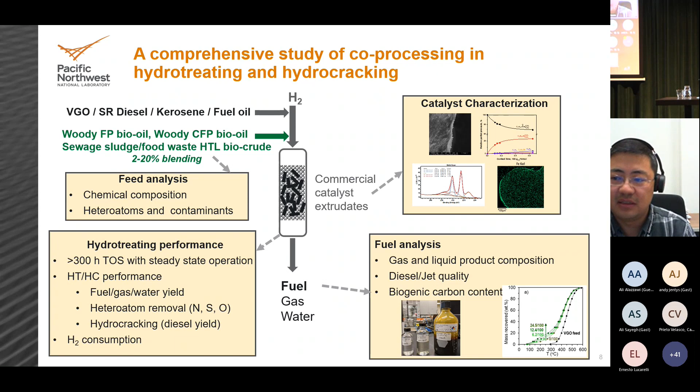First, I'd like to share that we were able to demonstrate high biogenic carbon incorporation for biocrude co-processing, as shown here when we co-process VGO with HTL biocrude. Specifically, this HTL biocrude was generated from hydrothermal liquefaction of wastewater sludge. At roughly 5% blending through a hydrotreating-hydrocracking two-stage process -- not deep hydrocracking, but mild hydrocracking -- we were able to demonstrate that more than 97% of the carbon in the biocrude was incorporated into the final fuel products.

The other 3% was lost in gas product. For the diesel fraction after this two-step process, we were able to show that we reached the sulfur requirement and other requirements, and also a higher cetane number, which makes sense because biocrude really contains some nice diesel fractions, with a high biogenic carbon content in the diesel fraction as well.

As the previous speaker mentioned, nitrogen is the biggest problem for biocrude, because it contains around 4 to 5% nitrogen. We definitely see competition between sulfur and nitrogen removal during the hydrotreating step, and this is critical. We have to deal with nitrogen in the low-temperature hydrotreating pretreatment step in order to enable the high-temperature hydrocracking step to get a higher diesel yield.

At the same time, we are diving into this nitrogen problem to provide kinetics and reactor model development to enable prediction of biocrude co-processing performance in both standalone hydrotreat and co-processing configurations. So we are primarily focused on some unique nitrogen-containing species in biocrude, for instance biocrude amide, as I'm showing here.

So this biocrude amide, its HDN mechanism is not really known. So we spent some time to figure out the reaction network of this specific molecule, and also compared the kinetics of this molecule to other oxygen, nitrogen, and sulfur containing species normally seen in biocrude.

By doing that, we can measure all those kinetic parameters and apparent activation energies, and we use all that information to develop a kinetic-based reactor model for co-processing, which is based on the Aspen HYSYS refinery model.

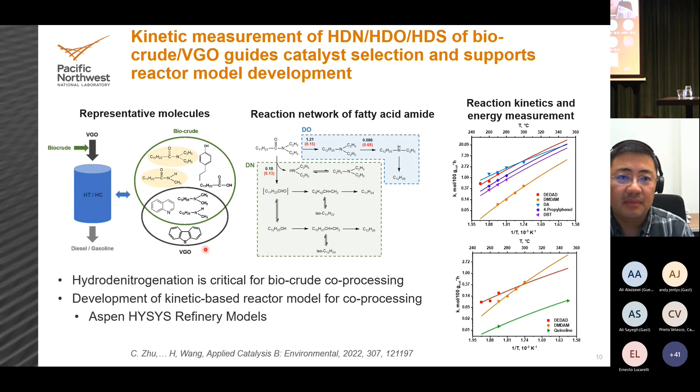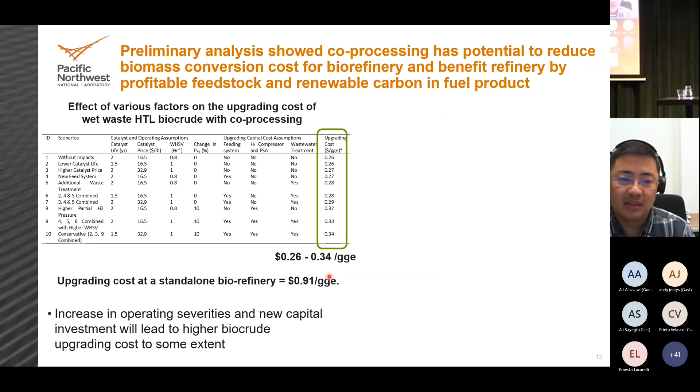So next, we know that for co-processing, another biggest challenge is how you can accurately measure your biocrude content in your product, and therefore claim the credits, and also how you can monitor the distribution of biogenic carbon in different streams to help understand their fate during co-processing.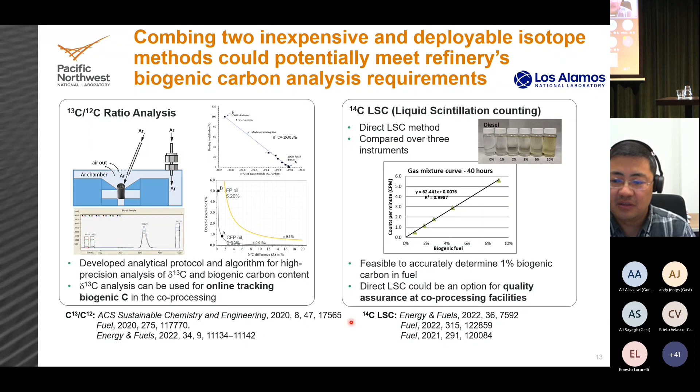So hopefully I showed you today that at PNNL we are working on continuous advanced HTL and hydrotreating to really convert wet waste to useful fuel product. For co-processing, we demonstrate high biogenic carbon incorporation, and by really taking care of HDN, we can manage the heteroatom computation and removal.

And we can manage catalytic activation, and we believe that co-processing can be beneficial to both biorefinery and the refinery. We are also developing isotope methods to really measure the biogenic carbon content in products in the process.

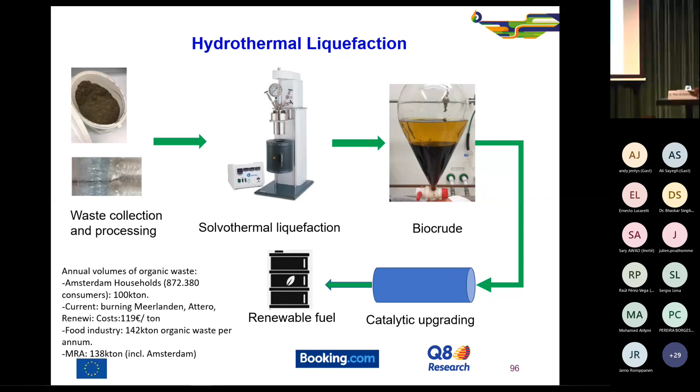We were actually supposed to look at a bigger project covering all these aspects, with funding by Transavia and KLM. But that was just before COVID started, so we had to stop the project. As you know, all the airlines went into financial trouble, and we hope we can restart that at some point.

I will not go into this, you all know this already, it's familiar.

Then we started a project with local plastics recycling companies, looking at chemical recycling of plastics with HTL on a small scale. As you know, plastics is getting to be a bigger and bigger problem. If we look at the amount recycled, it is only below 10% of the total amount of plastic waste. A lot of plastic is simply landfilled or composted. So this is going to be a bigger problem in the future.

In 2019, there was 460 million tons of plastics, and the projected growth of plastics is going to be 3 times more by 2060. So it's going to be a much bigger amount.

This really prompted us to look into that area as well, with local plastics recycling companies. We looked at the plastics which are not suitable for recycling by mechanical recycling—at the end of mechanical recycling, you still have these plastics which are not amenable to it. So can we do chemical recycling by HTL?

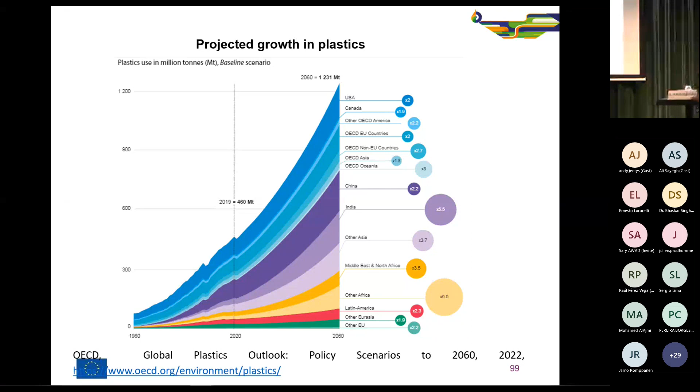That also brought us a new project from Horizon Europe this year, which looks at closing the loop in the plastic life cycle. The objective of this project is to valorize a wide range of unsorted plastic and textile waste. We are looking at quite a few routes here, including...

pyrolysis, gasification, and enzyme fermentation. The idea is to take waste plastics including polyethylene, polypropylene, polystyrene, and so on, and also waste textiles, and look at different routes, comparing them from a technological, economical, and life cycle point of view.

This is overall a 20 million euro project. For the HTL part, done by me at the University of Amsterdam, we have around 1.6 million euros, which is quite significant—I think, of course, not enough money looking at the wider picture of the challenge, but still something to do.

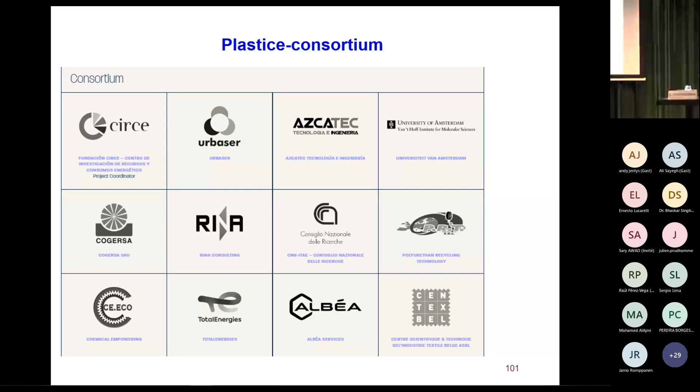This is the consortium, which involves almost 20 partners, starting from Circe and Urbaser, Azcatec, Cogersa, and so on, including Total Energies and a few textile companies as well. Here you will also see polymer companies, waste recycling companies, and so on—all partners covering the value chains are represented in the consortium, typical of EU projects.

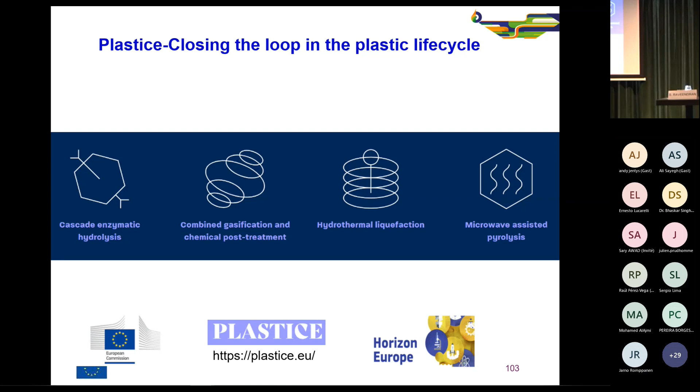As I mentioned, we are looking at different routes: hydrolysis, gasification, liquefaction, and microwave-assisted pyrolysis. The objective in liquefaction is to take the waste streams of polypropylene, polyethylene, and polystyrene from the Spanish waste recycling company Cogersa, and convert them to synthetic oil by HTL. This synthetic oil will go to Total Energies, who will upgrade and crack it to make olefins again. These olefins will then be used for making polymers by the polymer companies and other compounds—so the loop will close, forming a closed loop. That is the overall idea of the project.

We actually only started this recently, last month, and this is typical of the plastics waste we are handling—this comes from Cogersa again.

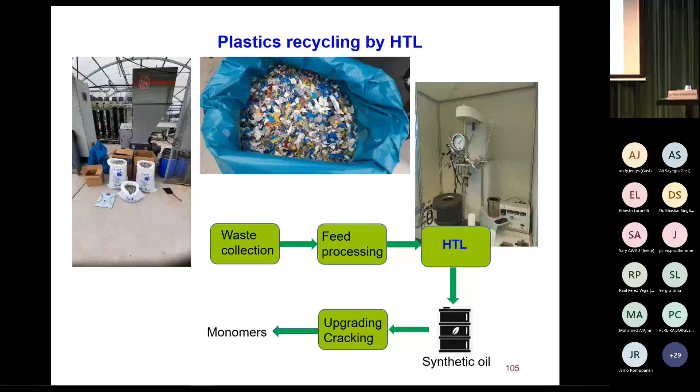As you can see, it's a mixed shredded plastic waste, which will go to our HTL reactors. We have both batch HTL reactors with different capacities, as well as a continuous HTL reactor, at a much lower level compared to the facilities maybe in Aalborg and other partners, but still we can do some work here. We also collaborate with local companies, local engineering companies, and the idea is that by the end of the project, we will build a pilot facility for waste plastics.

With that, I would like to end, but it is nice to be here and nice to learn from previous projects and previous experiences. I also hope that we can collaborate within this framework, collaborate in the next future and also learn from your experience so that we don't make the mistakes again. And we can, of course, reinforce each other.

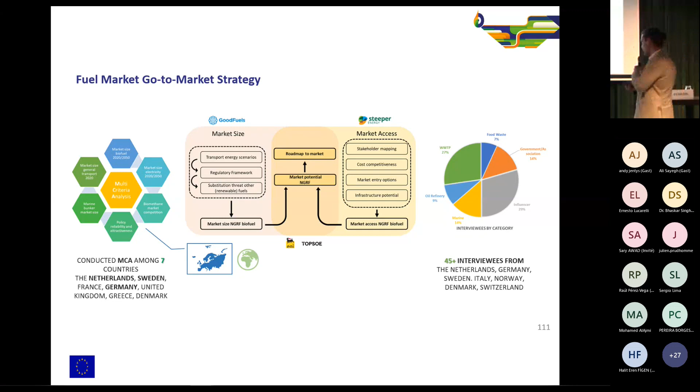First of all, how do we understand the market? As I mentioned before, not only today's market, but mainly future markets, because we are addressing energy transition, and it's not only about today, but...